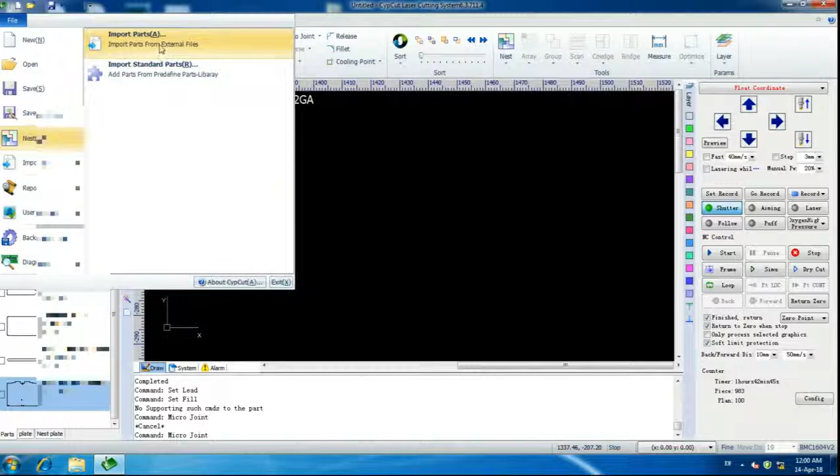So the first thing, to nest a component, we are going to go up to File, go to Nest, Import Parts. I always do everything in DXF. I don't save it as laser documents because I'm always changing how I do things. So now we're going to select this part here. These names should all be blurred. It's, you know, for a reason.

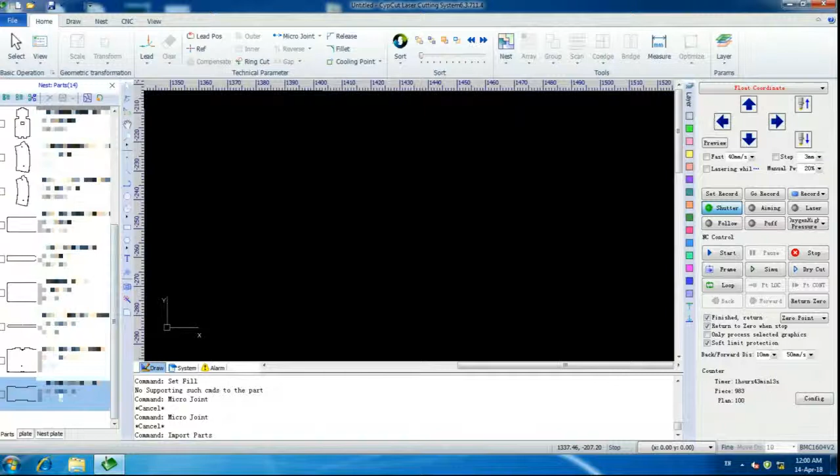So we have this part over here. That's the one we want. We hit open. Now, I've already done this a bunch of times. This whole sidebar is full of components. So now we're going to right-click on our part and click Edit Parts. Now here's where we're going to start setting up the component.

So the first thing we're going to do is select whatever we want to edit. These top icons up here are only going to have effect on whatever's selected. So if you only want to do, say, certain geometry, like holes inside, you want compensated or different leads, then say outside geometry, just select what you want and then select the outside to edit that part.

So, the first thing we're going to go ahead and do is hit compensate. Now, I'm going to show you how to calculate this in another video. Basically, you just cut a square of a known size, measure it, and then add on half the amount that it is different. I'm going to check all expand. You can do inner mold shrink, outer mold expand, but for certain configurations of the way I do things, that doesn't work. So I select either expand or shrink depending on what I'm doing. So outer geometry, we expand.

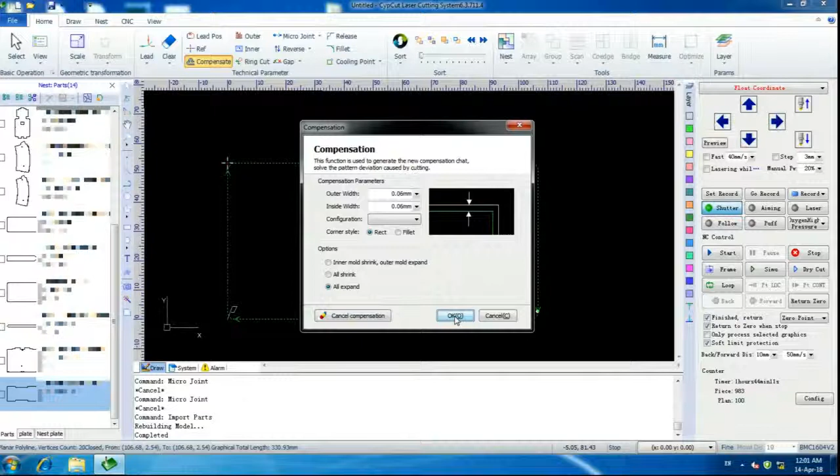Hit OK, and as you can see, it has now drawn a second line at an offset distance that I determined, and that white line is where the center of the laser beam is going to travel, and this is going to be the edge of what gets cut.

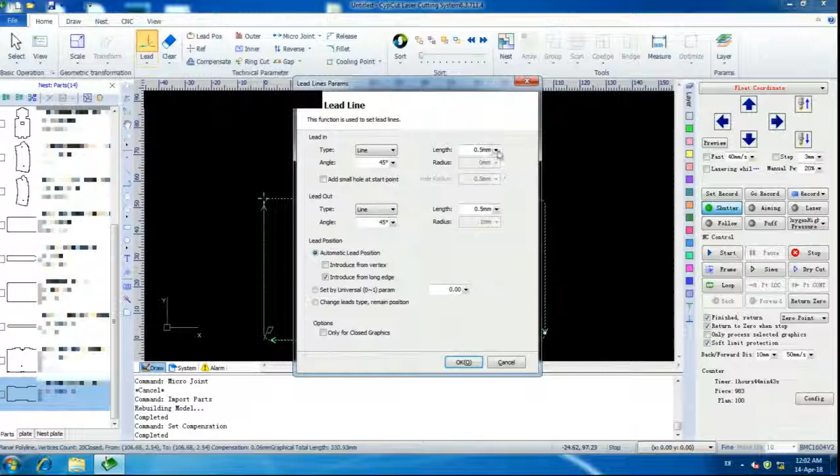So the next thing we're going to do, we're going to set up our leads. Now I got kind of this funny recipe I like. I use lead in line, 45 degree, 0.5 millimeter length, and lead out. We hit OK, and we're going to change the lead position. So that's this button here, and we're going to select right here.

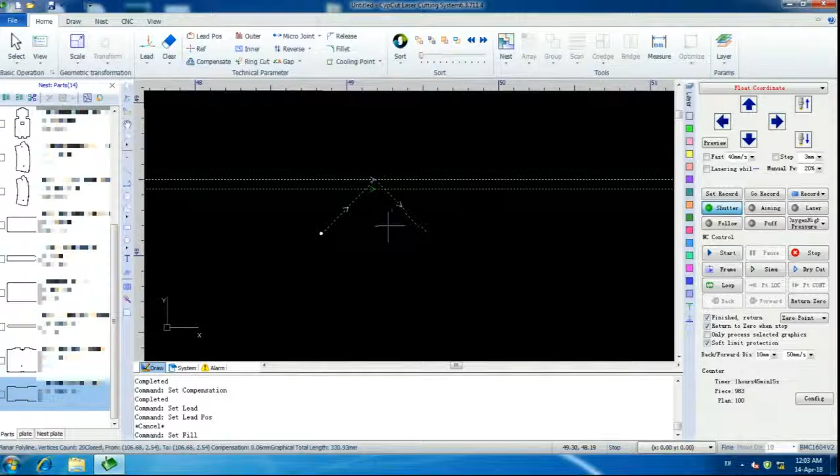Now if you look, I've got these 45 lines going out. What we're going to do is select inner. That's going to flip it. Now, if you had set your compensation up to automatically find inner and outer, it would flip your compensation, which is why I tell it specifically to expand the compensation instead of letting it figure it out on its own.

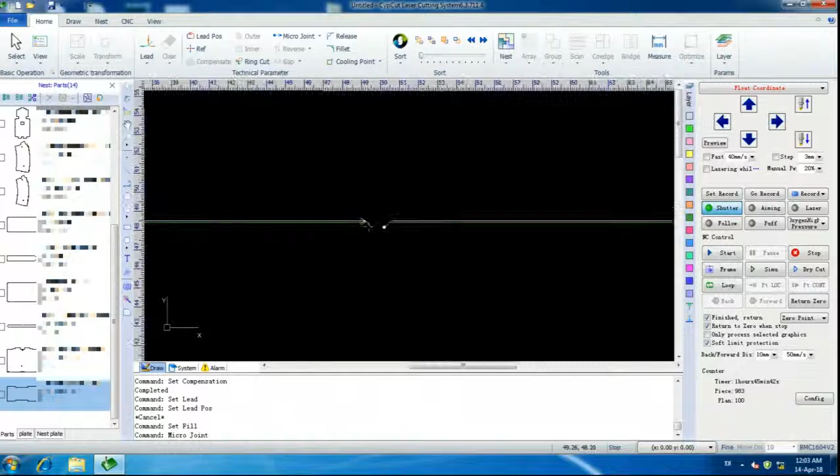Then finally we click micro joint, and for some reason it doesn't select on the white line. You got to go to the line that's your actual part, select in between these two, and I like 1.4 millimeter. Now what this is going to give you is about a 0.6 millimeter gap in between here, and it's going to start the laser inside of the part, and then it's going to end inside of the part. So it breaks off clean. Well, it's not perfect, but at least the spur isn't sticking out, which will throw off dies and tooling. Your choice on how you want to do that.

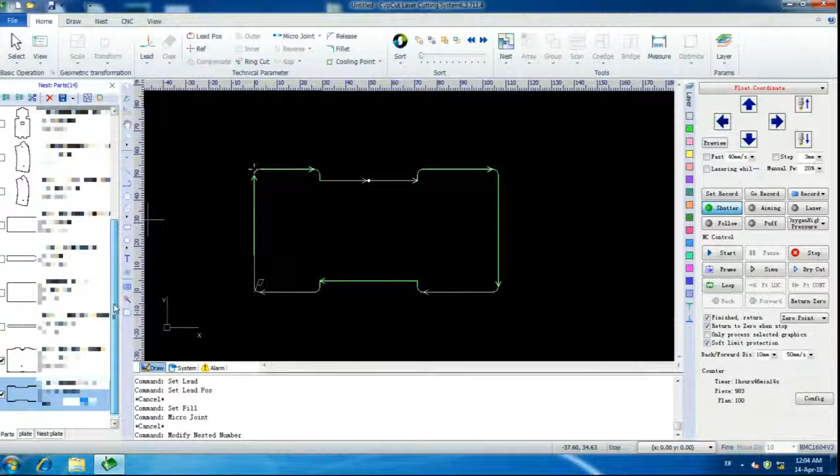But now this part is set up, so we're going to come over. We're going to select how many we want, and I want 500 of each of these parts. Check the little boxes that we want them. Alright, so after you have all of your parts, your part numbers figured out and dialed in, you can go ahead and click this button over here that looks kind of like a puzzle piece.

And you're going to go, in this case, selected parts. And I use standard plates. In my case, they're 1215 millimeter by 1215 millimeter, which works out to about 4x4. Plate thickness, plate material, really doesn't matter.

So now we're going to look at part gap. That's the space in between the components. 3 millimeter works for me and my thin material. Plate margins, 4 millimeter. That works because that's about the width of the laser dot for setting up. So it's good to have a decent margin on there. I'm letting my rotation angle be 90. You could do 45, 180, and then this is do not rotate in Chinese apparently.

90 works. 45 starts adding more potential options for how it can rotate a component, so I just like to leave it at 90. Auto optimize, I'm not actually sure what that is exactly. Remnant will cut the sheet off. Be careful with that. If you set your sheet sizes wrong, it will cut off the sheet, so be careful with that. I've used it a few times. I don't use it too much though. Usually I'll just cut it off with a pair of shears.

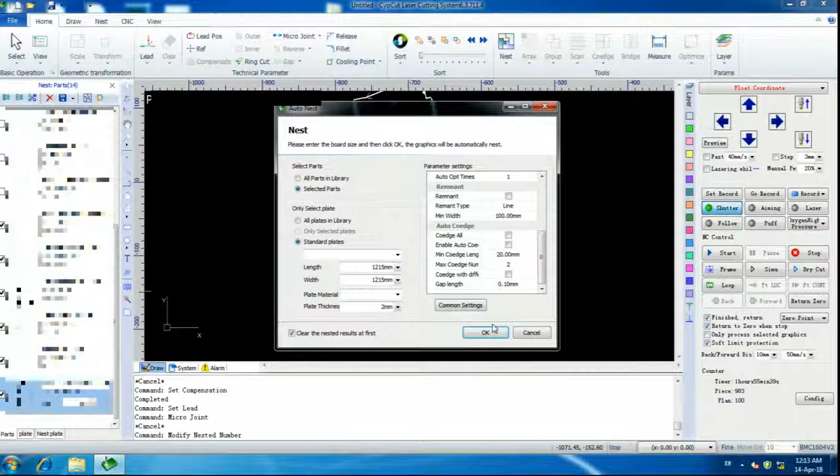Max co-edge number. But I don't have co-edge on because my parts require a high level of accuracy. If you have co-edge, it really doesn't use your compensations. So I don't like using it. You can if your parts don't need much accuracy, but then why are you running a laser? Okay, so we're gonna hit OK, and it's gonna start arranging the components onto sheets.

And so a few little notes while we're waiting. The limit on how many components you can nest is 999 per component. So if you're doing more than that, you might look into either doing batches of components or using an array copy if the part is so small that you're making that many. The other limit is you are limited to 20 sheets. That is regardless of the size of your machine. So on a little 4x4 like this one, it does start to become a little bit of a problem.

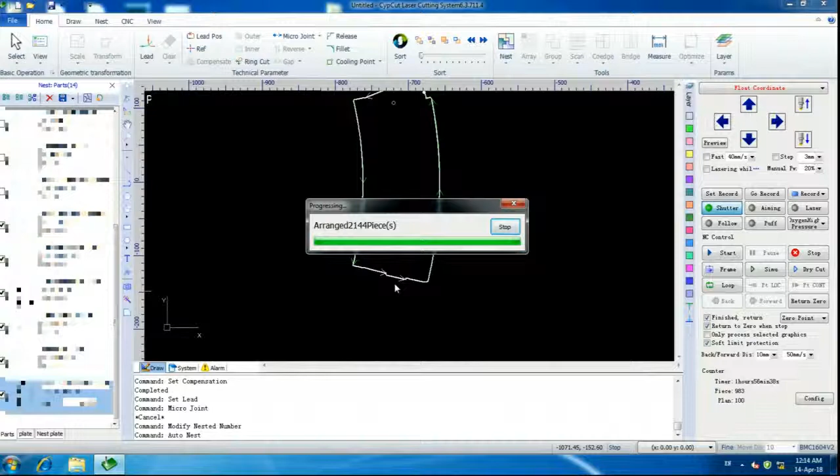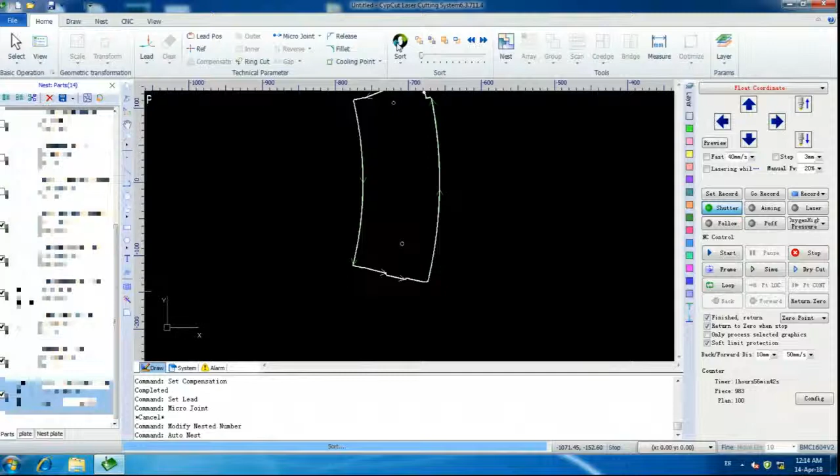Okay, 2100 pieces, 2144. That does not seem like the full number of the components I requested. So I think I hit the limit of how many parts I can do. Oh, another thing to note, that 45-degree internal cut that I did, where I told it to cut inward, if you touch the sort button, that's this button up here, it's going to flip it back the other way. It tries to save you from yourself, but that is an important thing to note because it will put all the bumps outside.

Alright, hey, look at this. Okay, so nest plates. So hey, 19 sheets, that's perfect. There we go. That is almost 90% utilization of the material, and as you can see, it only took a minute. So the other little warning I have for you guys, and we keep making this mistake, is you have to manually switch to the next sheet each time, and I have been forgetting to do that, so I end up with like 30 extra components. So let's go ahead and load up the first sheet, and we'll start cutting.

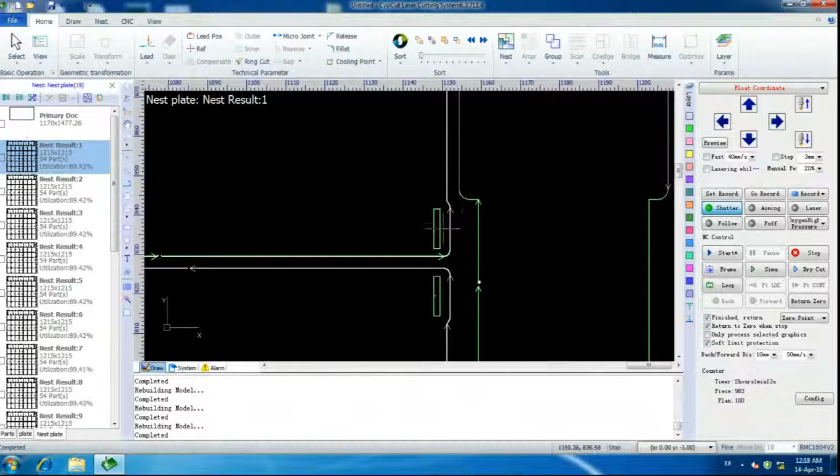Just a little mention, if you guys do really small parts, geometry like this square is only just over 1 millimeter wide, or about 50 thousandths of an inch. When it cuts around, it's going to blow out, and sometimes it hits the edge of the nozzle, which causes a capacitance error. Just something to be aware of. Your machine's not broken. It's just parts like this really mess it up bad.

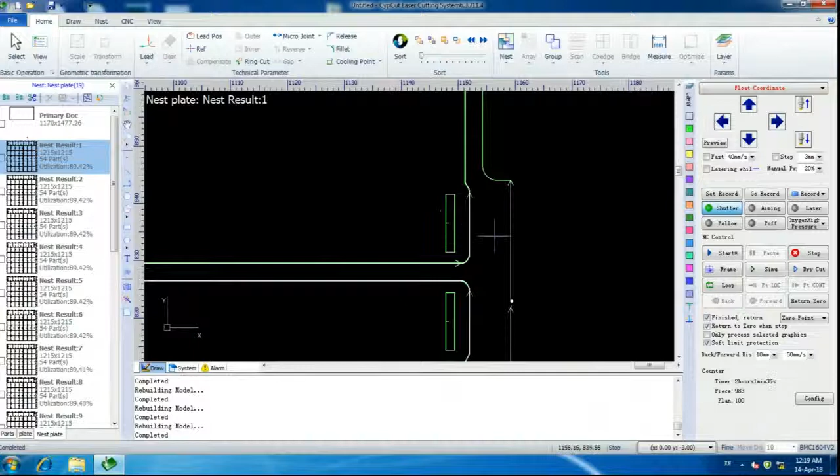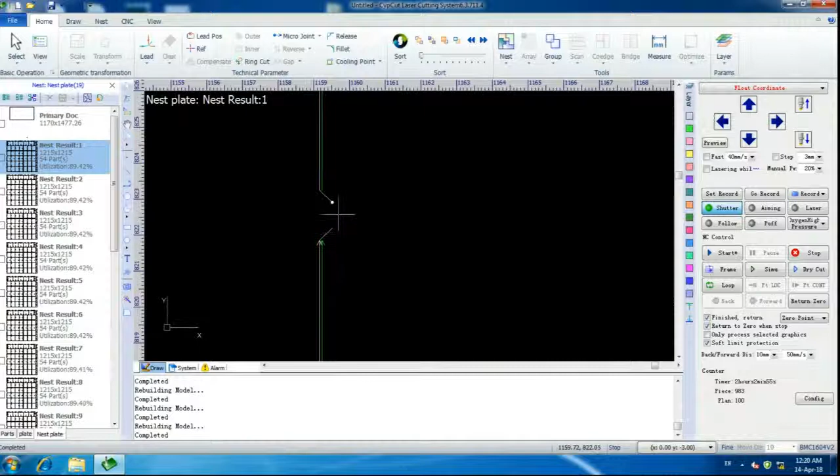Another little thing I wanted to just real quick mention. Here's a great example of how owning your own laser is a big advantage. This component right here, this kind of rectangle, actually goes through another shearing operation. Now, if I was job shopping this thing out, the job shop's not going to know that. So I know that I can leave a gouge in the side of the component, and it doesn't cause any problems because this all gets trimmed anyway at a later process. You can do that with a lot of things. This section of this component will be buried underneath another part, so you won't ever see that notch. And that's just one of the many advantages of owning your own laser.

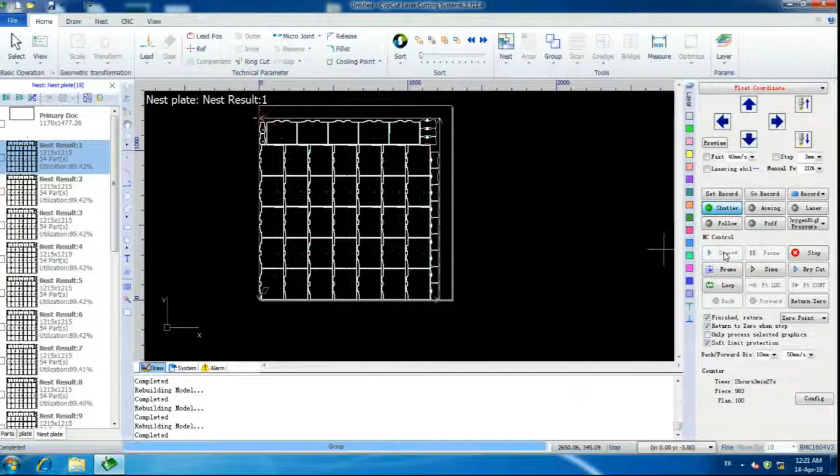So we're going to go ahead. I've already set the sheet. I'm just going to hit start here instead of using the remote. And Mike is going to turn the fan on. Thank you. And we're off. And you can see live speed of the machine cutting right here. That red X is where the position of the center is. In that corner. Yeah, there usually is.

You do have a certain throwaway rate on components. You don't get 100%. You end up throwing away not a ton of parts, but a fair number of them. What, about 2% or so? I'd say between 2 and 5% if it's running decently, depending on the complexity and your level of requirement. Capacitance error out. Yep. All right. So what we do then is we don't do anything. We just hit resume, and boom, we're back to cutting again.

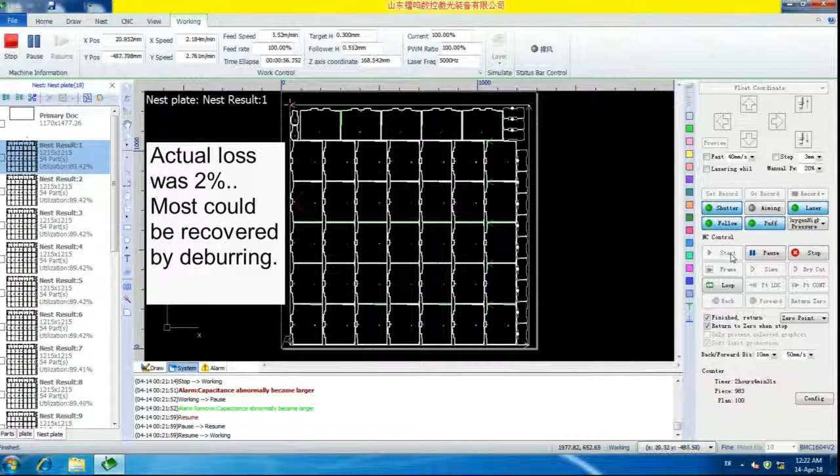It does this a lot on this component. I don't think there's really a good way to fix it, so that's just what it is. Primarily it's because it's such a large square chunk that's coming out of it. Somehow it always bumps up and hits the nozzle. There's just no way around that. So, all right, we're going to turn the video off at this point.

So these are the components after they came out of the laser cutter, and you can see they're hanging on. We're able to handle them and move them out of the machine. Takes a couple wiggles and the part comes out. And the edges, that little gap is more or less smooth. This one's a little bit of a bump, but this one is flat with a little nick in it.

Yeah, it's almost minimal. It's very minimal. Alright, and the same thing with this. There's a little nick in it, but otherwise the parts come out, and at this point what we do is we take them out onto a flat table with heavy cardboard on it. That's basically other sheets of, this is 16 gauge underneath it, a stack of it, so that you can get the sheet nice and flat and wipe it down to get the cutter dust off of it. Flip it over, repeat wiping, getting the cutter dust off, and then break all the components out and stack them.

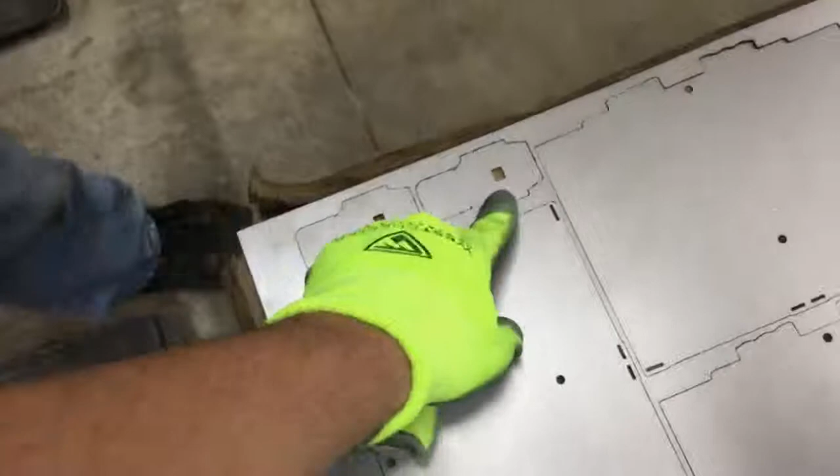And as you can see with the nesting software, it generally goes from largest part to smallest. So this is the biggest component that we have. So it fills the sheet as much as it can, and then it fills in the edges with the next size down that it can. And as you can see, where was it? Look through the camera. Right here, it couldn't get one of those other parts on, so it put one of these smaller pieces in. And here's another little note.

Even if you got your stuff dialed in really well, you should still expect occasional bad parts. This one's going to get put in the reject bin, and then we'll add it in at the end on the final sheet. Anything else? I'll just show the problem there. Yeah. You can see that's not ideal.

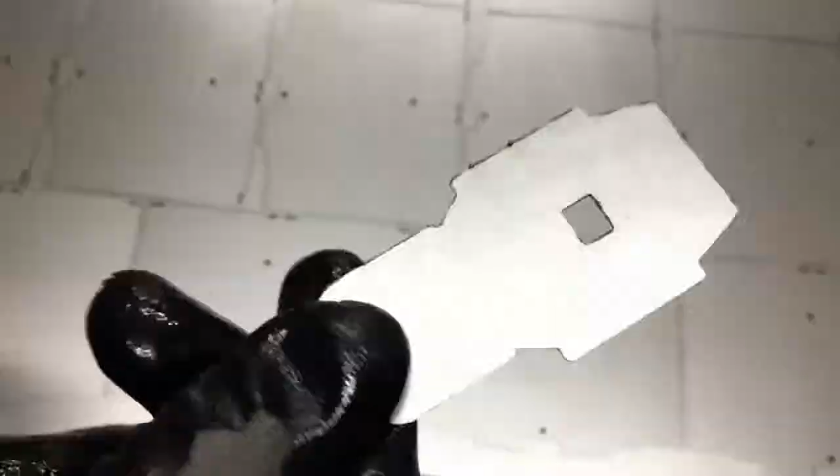But what it is, the sheet vibrated. Yeah, nothing we can do about that. It's not the laser's fault. The edge of the sheet was floating a little bit, and when you blow air on it, it starts flapping, and the machine just simply can't keep up with that. But the vast majority of the components are perfect, so that's all we really care about.

Alright, we've just finished cutting our first sheet. We've reloaded the machine with a new sheet and set its location using the remote control. Now this is very important to remember to do every time, is to click to the next sheet. Now if you're not sure if you've already done this or not, go ahead and click to the next one. If this stays white, it hasn't been done yet. So just keep that in mind.

As a note that I should have mentioned earlier, when you're setting up your parts, you don't set up your feed rates and your speeds in that screen. You set them up here in the nest plate area. You click layer, and it's going to be the color of your part. I only have one layer here, obviously, and this is where you set up your stuff. More on that probably in another video. You'd click load, select the material from a pre-saved list that you would make up at a different point in time.

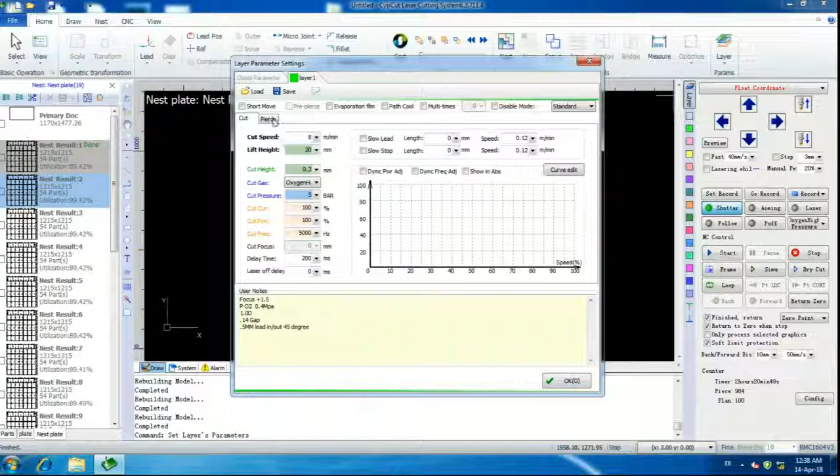Set up your focus, your air pressure. These are so I remember my gap and my 45-degree lead in, lead out with 0.5 millimeter lead. That's the one I showed you earlier. So these are my settings. No pierce, cut. Just pause the video if you want to look at it. All right. So that is where you would set that up. You'd set it up before you start cutting the first piece. I already had it set up, so that's why I didn't do it.

Okay, so now we have clicked on to nest result number 2. We are going to click the start button, and it is going to start cutting the second sheet. And then we will repeat that for all of the sheets that we make. Now, if you forget to do this, you can cut a piece multiple times, as many times as you accidentally keep cutting it. So we've ended up with extra parts a few times.